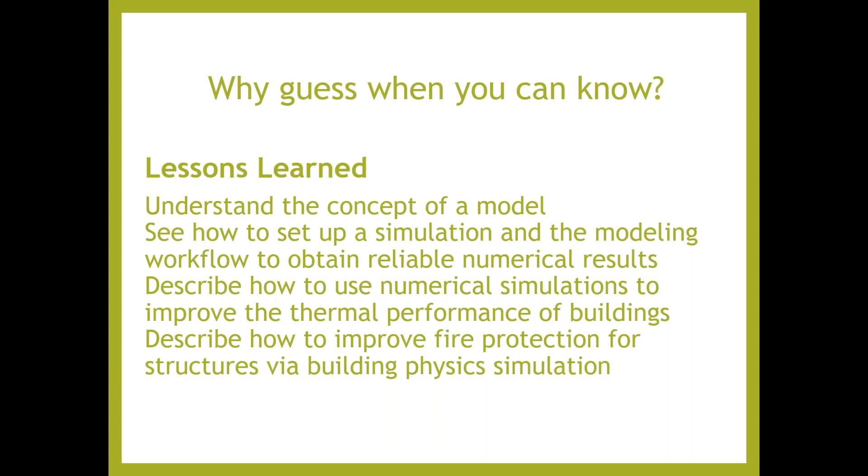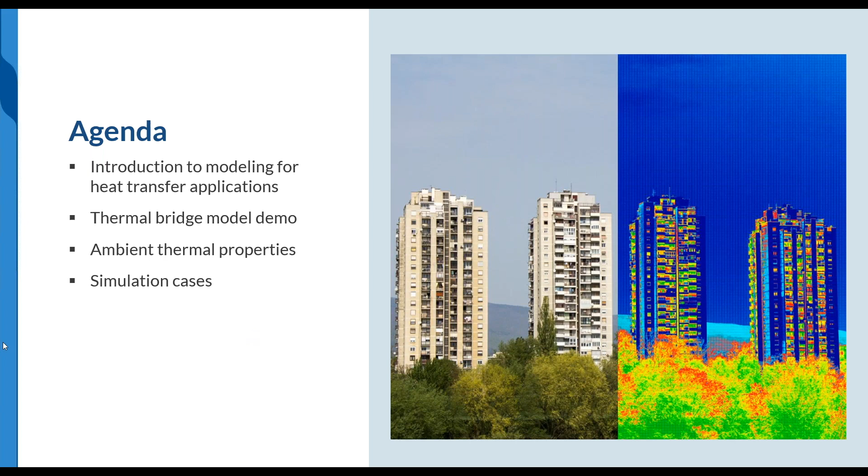Okay, so introduction to modeling for heat transfer application. First of all, what are the benefits of numerical simulation, and what can you expect from it?

There are actually multiple motivations to use numerical simulation. The benefits are not the same for all projects. It depends on what you know already and what you want to know.

I often say that the art of simulation is to tell the software you are using what you know, so that you can get as much as possible from the software, from the simulation, to know more about the system you are interested in.

So, for example, if you observe something like a poor thermal performance that is not expected, then the numerical simulation can help to understand how it occurs.

It helps, for example, if your model contains the temperature, thanks to simulation, it's possible to check the temperature at any point, at any time, which is of course very difficult in reality, but also it helps to check the importance of the different physical mechanisms, like condensation, ventilation, or thermal bridge.

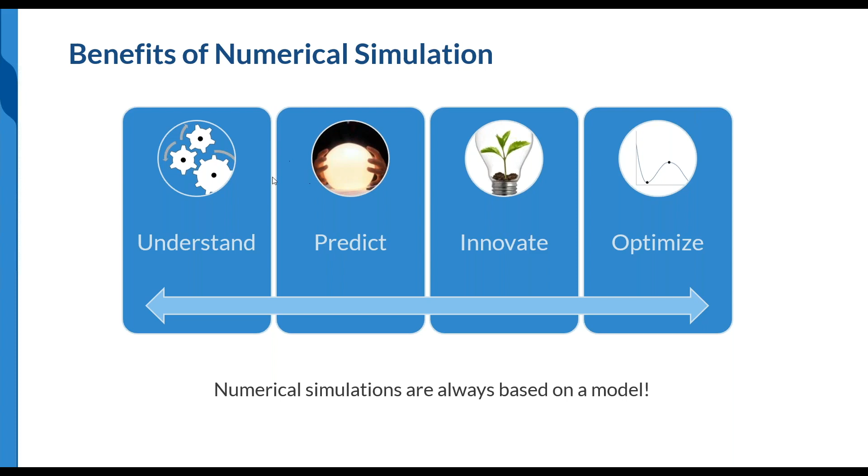And a model is a representation of a reality. This concept of representation is really important, and it's supposed to reproduce or to predict a real behavior, but for a range of configurations, and it's based on the laws of science that describe physical phenomena and translate them in terms of differential equations.

For example, Navier-Stokes equations describe fluid flow behavior, or Maxwell equations describe electromagnetic fields. And traditionally, the physics are segregated into a single physics category, like fluid flow, heat transfer, structural mechanics, etc.

But in nature, they exist all together and they interact. So if you want to be accurate, it's needed to combine the physics in a model and get a correct description of reality. So the reality, in a sense, is always multiphysics.

And I insist on that already, but it's really important to keep in mind that a model is a representation of a reality. It's not the reality. And it's always simplified in a way or another, so that the model is manageable. The best model, I would say, is the simplest model that matches your need.

So it will always rely on some hypothesis that will limit the validity of a model to a range of configuration, which is supposed to be the range of configuration you are interested in. Let's take the example of a geometry.

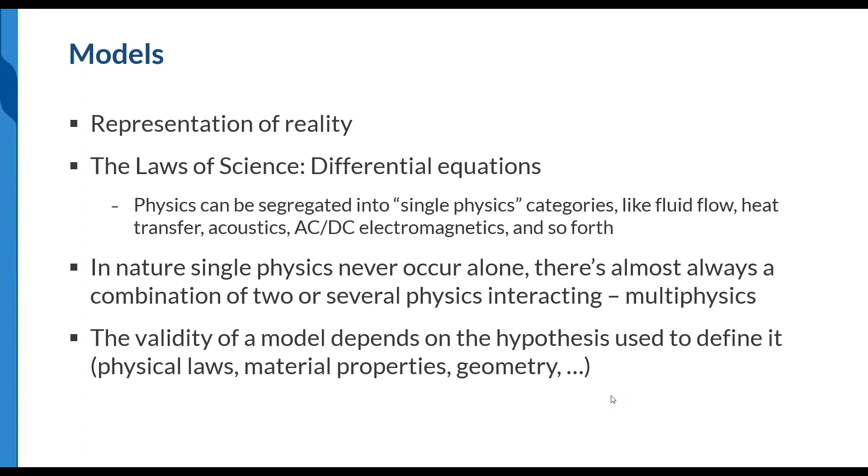And for this kind of system, we have a lot of efficient algorithms that can be solved efficiently on computers. Thanks to the computers, we get a solution that is the best approximation up to a tolerance that can be obtained for the discretization, for the mesh that we have chosen. In general, when you refine the discretization, when you use a finer mesh, the computational cost increases, but also the accuracy gets better and better.

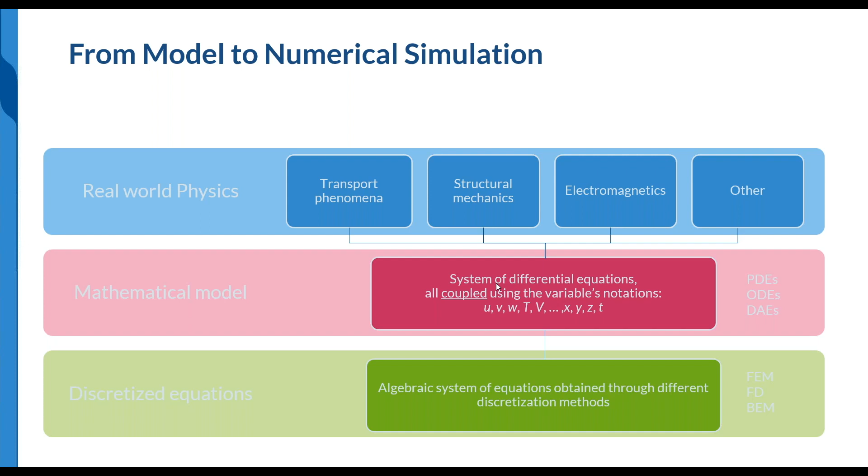So that's the classical step for setting up and solving a model. First of all, very important, the model definition. That's the very first step, and you cannot go forward until this has been completed. You need to define what you want to represent, the physics you want to account for, the material properties, etc. Everything that will be describing the model.

And maybe while you are working on this step, you will realize that you miss some inputs, like you miss material properties. So you need to find them before you go to the simulation software.

And then you start using the simulation software, which is rather straightforward, I would say. You define the geometry, as I mentioned earlier. The geometry should be accurate up to a level of detail that you want to account for, but you will also have to prescribe some boundary conditions. So it's important to have a geometry so that you are able to prescribe a boundary condition.

Let's say that you have a heat source in a device. Close to this heat source, the temperature field is changing a lot, and it's difficult to predict the temperature without simulation. So typically you cannot set a boundary condition very close to the heat source. But if you take something very far from this heat source, then you can assume that you have ambient temperature conditions, and you are able to prescribe a boundary condition.

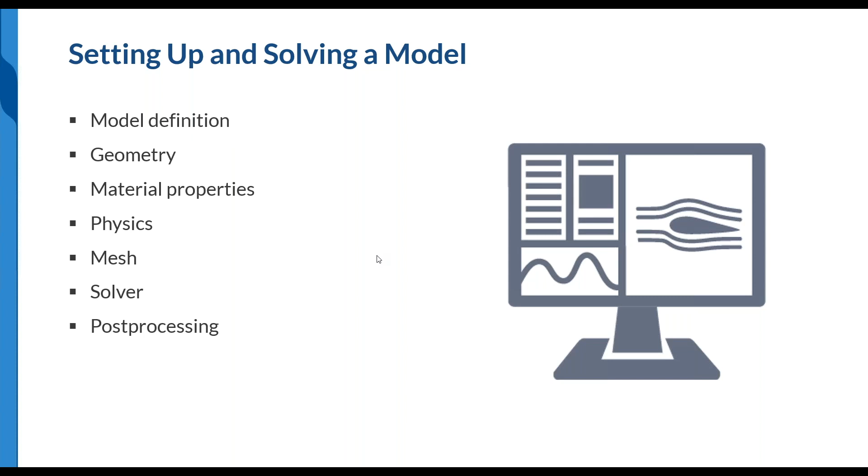So before we build the example, I will give some explanation about what we do, especially for heat transfer. That's my part, and that will be the core of most of the examples. So heat transfer occurs following three means: conduction, convection, or radiation. If you are able to describe the three kinds of heat transfer, then you are covering all heat transfer.

Heat transfer by conduction is something that occurs on material. If you are in vacuum, you have no heat transfer by conduction. But as soon as you have a material, you get conduction. It requires a temperature difference, and the magnitude of conduction is proportional to the material property, which is the thermal conductivity. So again, we have the physical laws that define the heat flux by conduction as minus the thermal conductivity times the gradient of the temperature.

This is something, of course, that you don't need to know, but that will be used under the hood to define the equation I mentioned in the introduction.

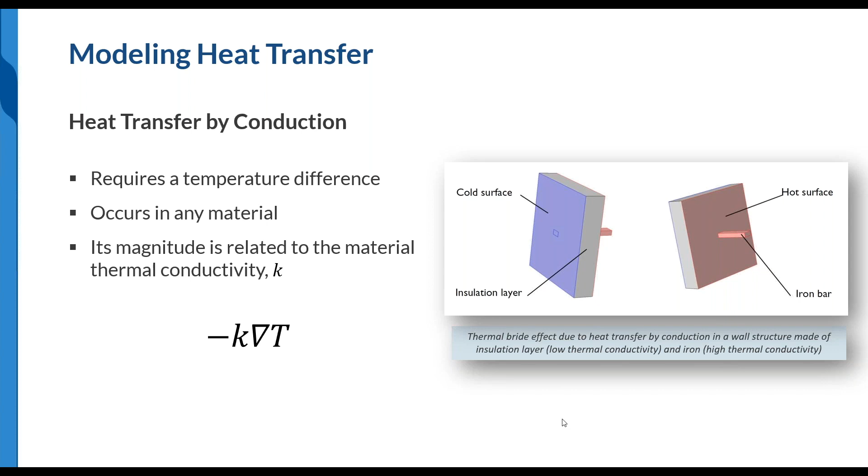So if you assume a case that we will demonstrate later on, where you have a wall made of insulation material with a cold surface, the blue surface here, and this is another view of the same geometry, but on the other side where you have a hot surface, then because you have a material between this cold and hot surface, you have a temperature difference and a given thermal conductivity, so you will have some heat transfer by conduction. And here you have two different materials, so you will have different conduction effects depending on the material properties. We'll go back on this example rather soon.

So the other means of heat transfer is heat transfer by convection. This one also occurs only when you have a material and motion. You can have forced convection when you have an active system responsible for the flow, or you can also have natural convection. In this case, it's just the buoyancy and the difference of density that is responsible for the motion.

Again, the physics laws give a definition of the magnitude of heat transfer by convection, which is proportional to a material property called the heat capacity, Cp, and also the density. So we have the density times the heat capacity times the velocity times the temperature that gives the magnitude of convection, heat transfer by convection, and that explains why conduction alone is not defining the temperature profile in this example.

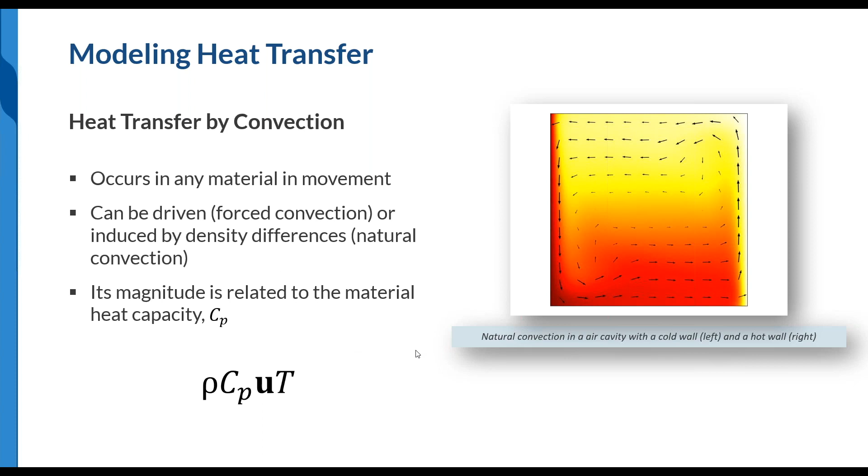And when you want to account for heat transfer, by default, you have to combine the three modes of heat transfer. If you know that for one reason or another, for example, there is no transparent media in your geometry, or there is no motion, then you can skip one of them. But if you don't know, then you may include all of them.

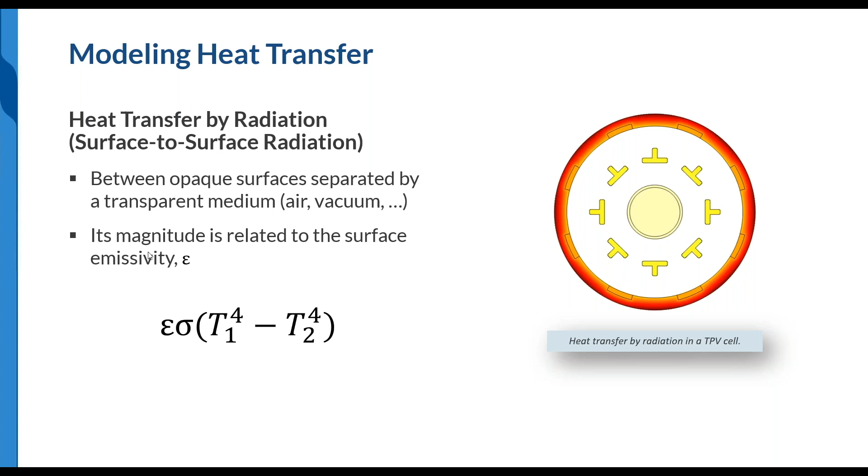Okay, so now I will show this example, this benchmark example, and we will build the model together. So first of all, I have to describe it.

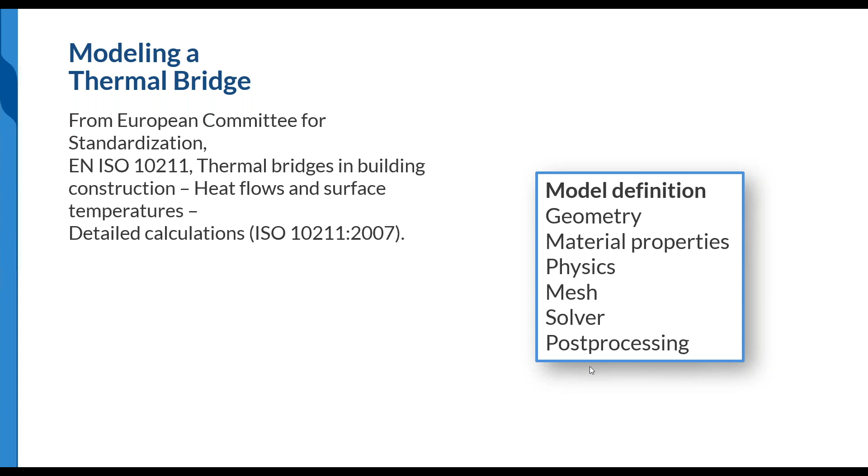So for this example, if we recall all the steps - model definition, geometry, etc. - we have to start with the model definition. In this case, we are lucky because the model is well documented and defined in the European standard for thermal bridges in building construction, so heat flow and surface temperature. This benchmark, this norm from 2007, is ISO 10211, and it gives all the details - the geometry, material property, the physics - all the physical details needed to build this example. Then it's up to us to find a mesh and solver settings that match the accuracy they expect.

Okay, so the geometry for this thermal bridge is the geometry we have seen before. It's a piece of wall which is 1 meter by 1 meter with a thickness of 20 centimeters. This is an insulating material, and it contains an iron beam. As you can expect, it will be responsible for a bad thermal bridge, and this beam is 10 centimeters thick, 60 centimeters long, and 50 millimeters high. So that's a pretty simple geometry.

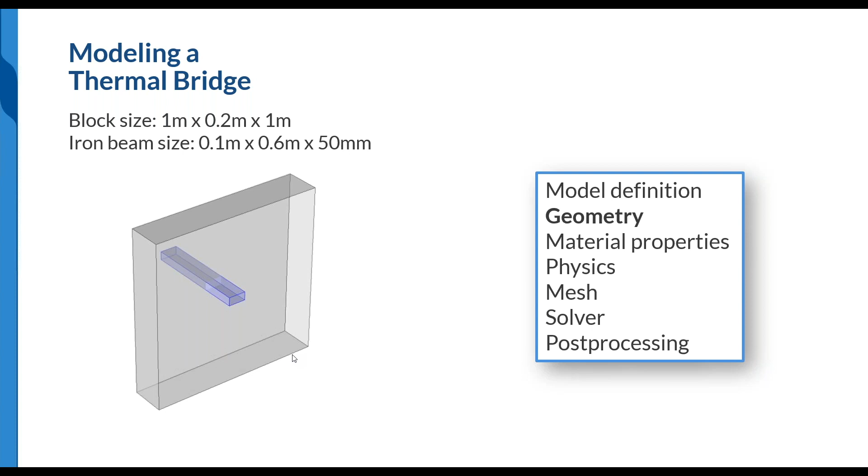In general, the geometry is of course much more complex, and you can either draw it in the simulation software or build it in a modeling geometry, a CAD software, and then import it into the simulation software. There are a number of standard tools for that, bridges between simulation software and CAD software.

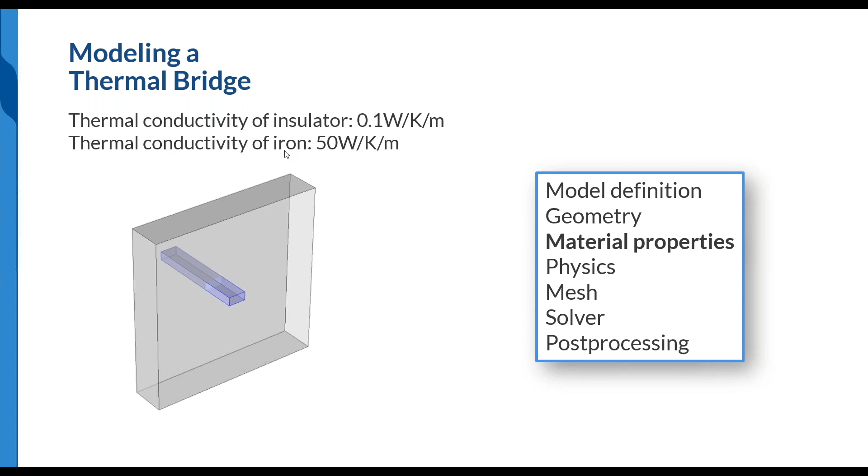Then for the material properties, we have a material property for the insulator and for the iron, so it's only two materials, and that's it. For the physics, of course, we have thermal conduction in solids. As soon as you have a material, you have conduction. There is no motion, so there is no convection, and the radiation is assumed to be small enough to be neglected.

So this model will contain only conduction. On both sides of this geometry, the blue face here represents the exterior and it's cold, and the inner surface here represents the interior, which is hot. We don't have a prescribed temperature, but we have a convective heat flux condition on both sides, which means we have an exchange heat flux proportional to the temperature difference between the surface temperature and the exterior or interior temperature, times a coefficient, which is the heat transfer coefficient, the convection coefficient.

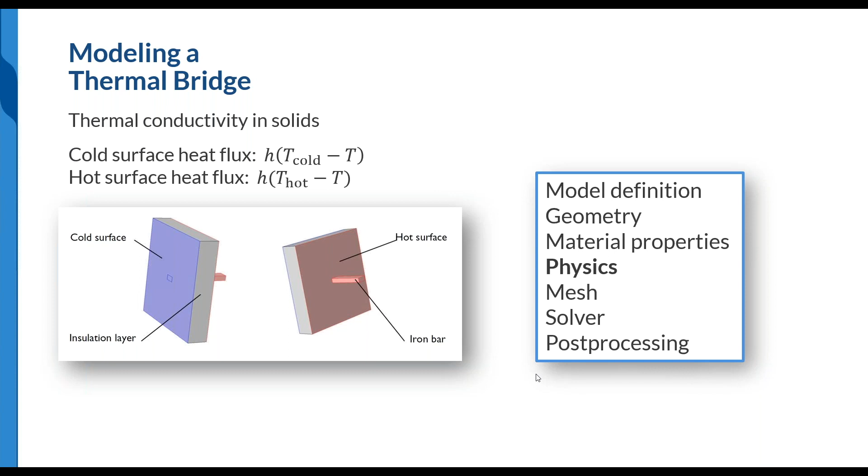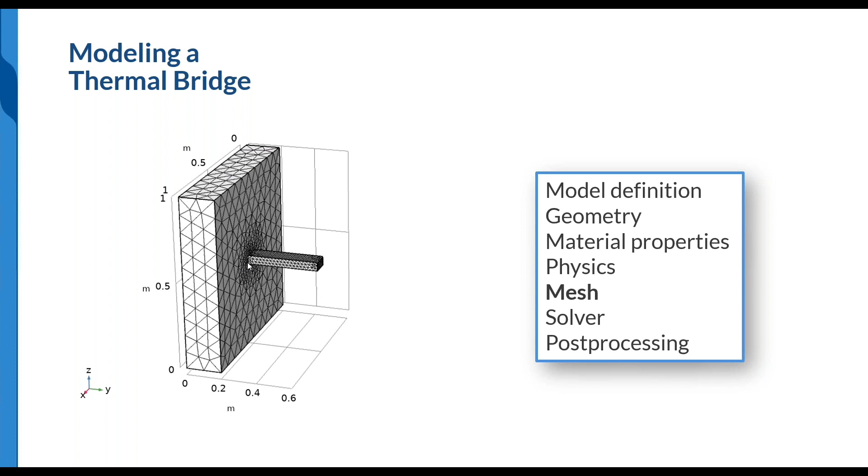And that's it. For the mesh, this is up to you. This is not something defined in the standard, so we have to find the good one, but we expect that we'll have temperature gradients at the junction between the iron bar and the insulation material. So we will use a finer mesh for the bar here.

For the solver, there is nothing special to it. It's such a small model that we can just use the default, and it's very quick to get a solution.

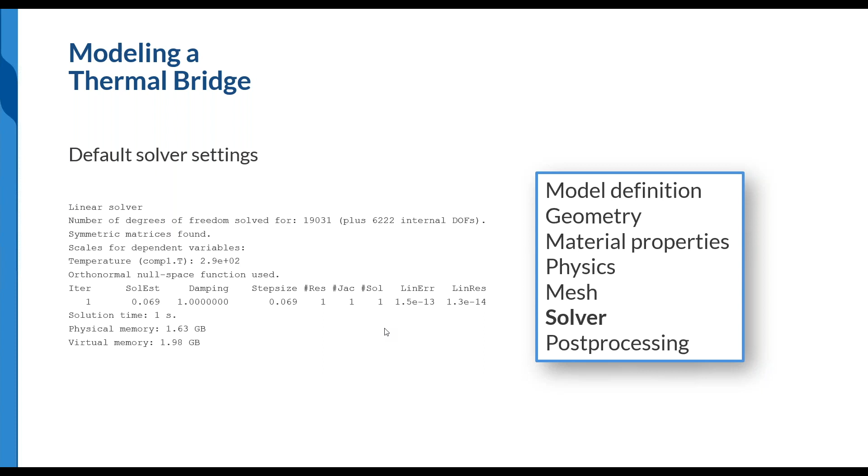And then, of course, the post-processing is what we are really interested in. We expect to be able to plot the temperature everywhere in the geometry. And again, the standard gives some target value for the highest temperature on the external side. So on this side, because of the iron bar, you expect that you will get some heat from the inside that is reaching the external side. So the maximum temperature will be computed, and also the heat flux.

So due to a thermal bridge, the heat flux on this face will be larger, than without the iron bar for sure. So let's switch to COMSOL Multiphysics to build this model live and see how to proceed.

So we have this model wizard that will guide us to build the model. So the first question is to select the space dimension. So obviously it's a 3D model.

Then we have access to a number of physics interfaces. You can see all the physics here. We are starting with a single physics model with heat transfer in solids. We could add more, but I start with just one physics.

And then we can also study different kinds of studies - stationary, time-dependent, or more advanced studies. In this case, the benchmark is looking at the steady state, not the startup effect or things like that, but just the steady state with a stationary study.

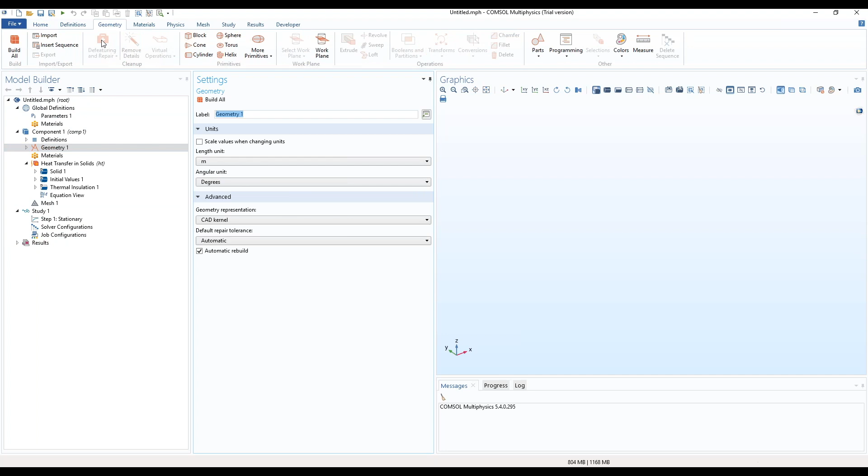So for the geometry, we don't need to import this geometry from another software. We can easily build it using the tools that are available, like we need a block for the wall.

So the block is 1 meter, then it's 0.2 meter thick and 1 meter high. So we can check how it looks like. This is this block. We will add another block for the iron bar.

So this is 10 centimeters, and then it's 60 centimeters long and 50 millimeters. You can see here that we have a unit, and if you don't want to work in meters, you can specify the unit using brackets like that. So here I say I want 50 millimeters.

And I have to think a little bit about the position. I will define the position of the center of this bar in the middle of this block, so 0.5 and 0.5, and the middle of the bar will be located at 0.3 for the y coordinate.

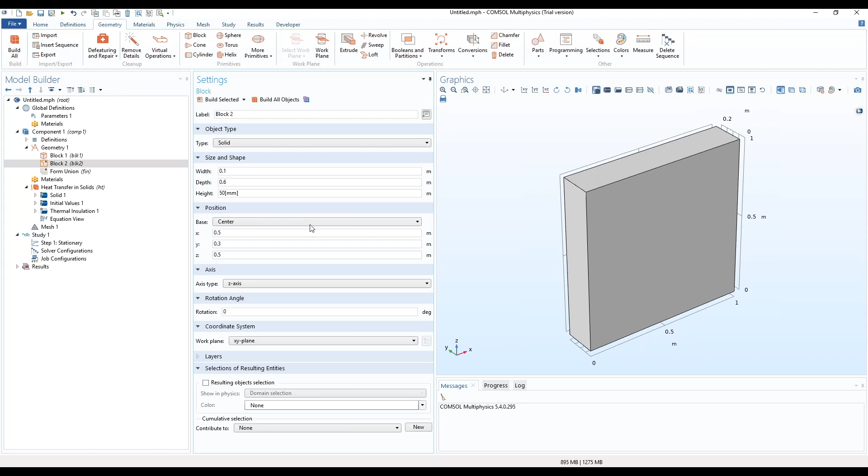So if I build everything, I can see that I have my bar made of iron, and the insulating material here.

As you can see, they intersect, so there is a region where, in a sense, we have both materials, and this is something that is detected at this step.

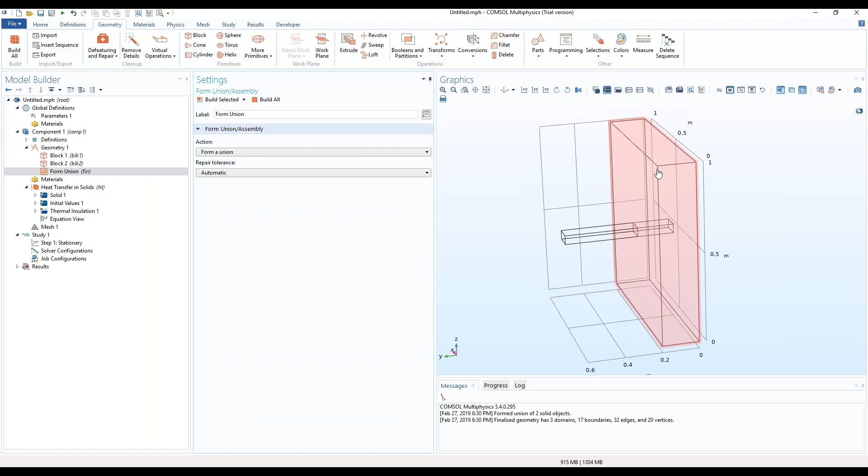And if I switch to wireframe rendering, you can see that there are 3 domains, one here, another one here, and another one here. So I don't want 2 domains for the iron bar, it's only one in reality.

So I will perform an additional step here for my geometry. There is something called virtual operation to form composite domains. And I will say that these 2 domains are actually a single domain.

And if I build all, now I can check that I have 1 domain for the insulating material and 1 domain for the iron bar.

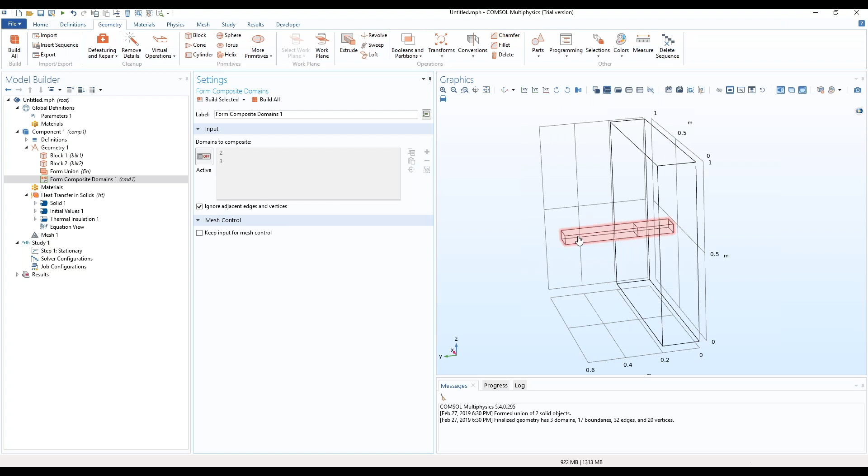So typically I'm done with the geometry definition, and I can switch to the material definition. So for the material here, I could...

Browse material libraries and get predefined materials, but in this case, I really want to stick to the standard. So I will create a blank material and define the material properties myself.

So for example, for this insulating material, or for the wall, the thermal conductivity has to be equal to 0.1, and I can also specify density, even if I'm not going to use it for a stationary study, but just for completeness, I define everything.

And if I add another material here for the iron bar, the thermal conductivity is much higher, it's about 50. And the density as well is higher, and the heat capacity is a little bit less, like that.

So now I have 2 materials. I have this one defined on domain 1. Domain 2 is overridden by the next material, which is iron.

Okay, so this step about material properties is now completed as well. I can switch to the physics.

So I have heat transfer in solids. This physics interface is responsible for translating the law of physics into equations that the mesh and the solver will take care of afterwards.

So for example, in the solids, there is an equation that we rely on with Fourier's law, for example, which is recalled here. And you can see that they involve some material properties, and these material properties are said to be taken from material.

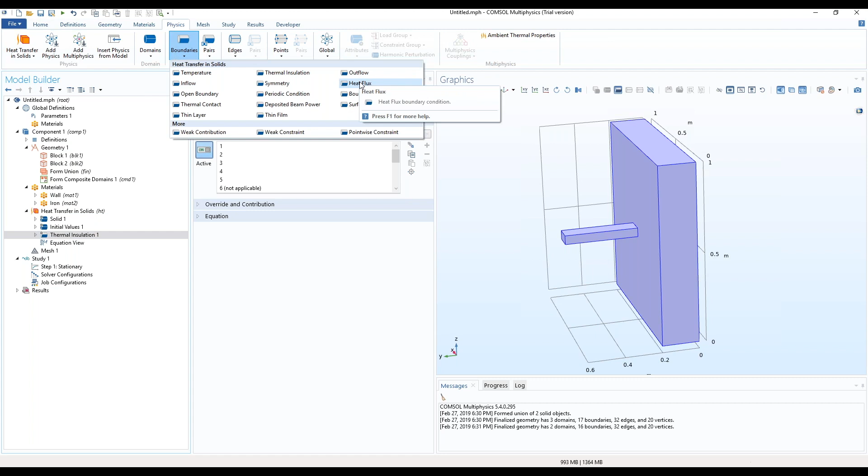So there is a heat flux boundary condition here. I have to select the boundary where I want to apply it, so I can change the view, for example, this one.

And thanks to this tool, I can select all the boundaries and go back to the view.

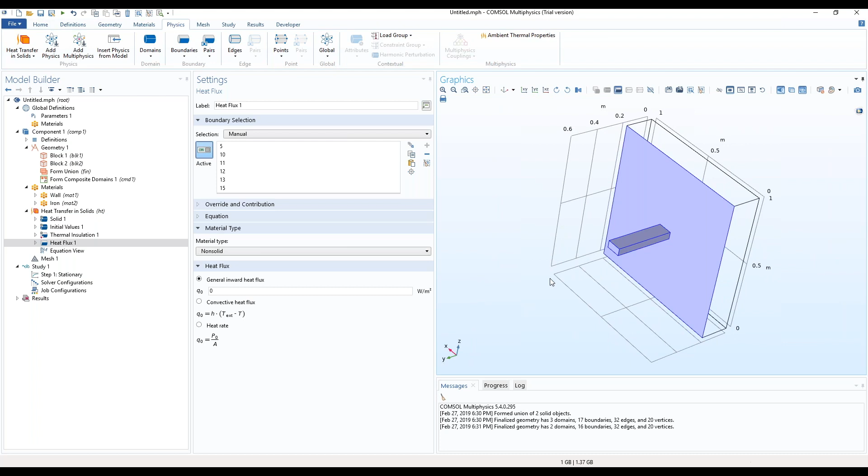Okay, I took all the boundaries except this one, so now I have all the interior boundaries. So I'm saying that I want to apply this boundary condition to all this boundary, and this boundary condition is a convective heat flux condition.

So here you can recognize the condition that I showed before, where the heat transfer coefficient is given and is 10.

And the exterior temperature, the benchmark uses a normalized temperature difference, so 1 degree between the inside and the outside. So here I'm just setting 1 Celsius, even if it's rather cold for inside.

That's the standard, and that's the definition of the model we want to reproduce. And I need to use another heat flux condition for the exterior. So the same convective heat flux condition, the same heat transfer coefficient, 10, but a different temperature.

So 0 Celsius here, and of course I need to specify which boundaries are exposed to this condition. So these 2 boundaries, and that's it. And I'm done with physics.

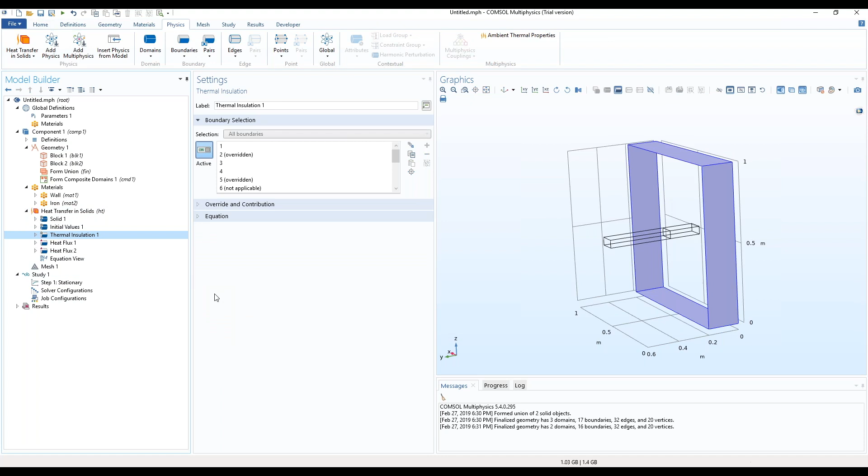So if we go back to thermal insulation, you can see that it has been overridden in most of the boundaries, but it's only now active on 4 boundaries, which is exactly what I was willing to do.

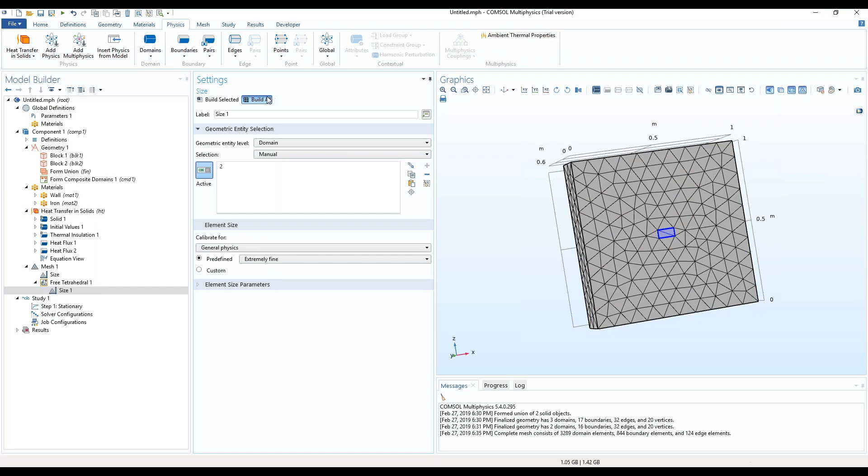So now we can check the default mesh. The default mesh is like that. It's pretty coarse for the iron bar, for example, so we can easily tune it manually. We can edit the automatic sequence, and we see that there are some instructions to build the mesh, and here we can prescribe a different size for the bar. So for one particular domain, we'll say that we want a much finer mesh, and rebuild the mesh, and you can see that now we get a finer mesh here, which will help to get accurate results.

For the solver, there is not much to do. We can just solve. It's very quick.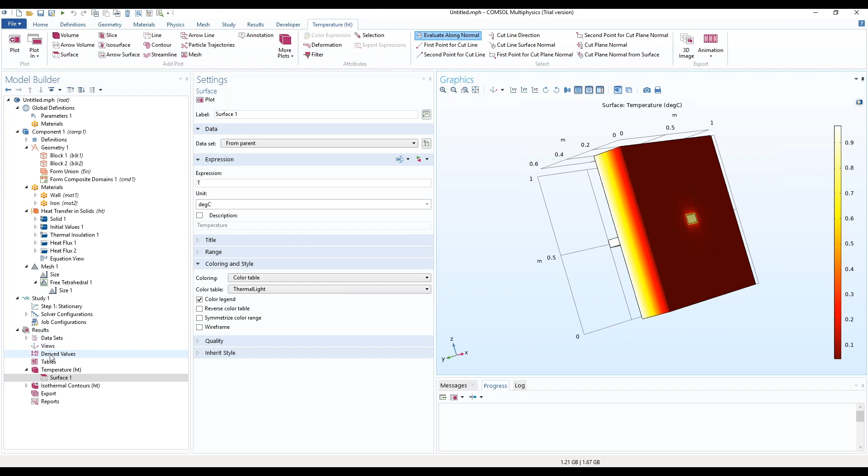And then the benchmark gives some indication about what we should find for the maximum temperature on this side, so we can evaluate the maximum temperature on the surface formed by these 2 boundaries, and check the maximum temperature on these 2 boundaries in Celsius. And so if we ask to evaluate, we see that the maximum temperature is 0.8 Celsius.

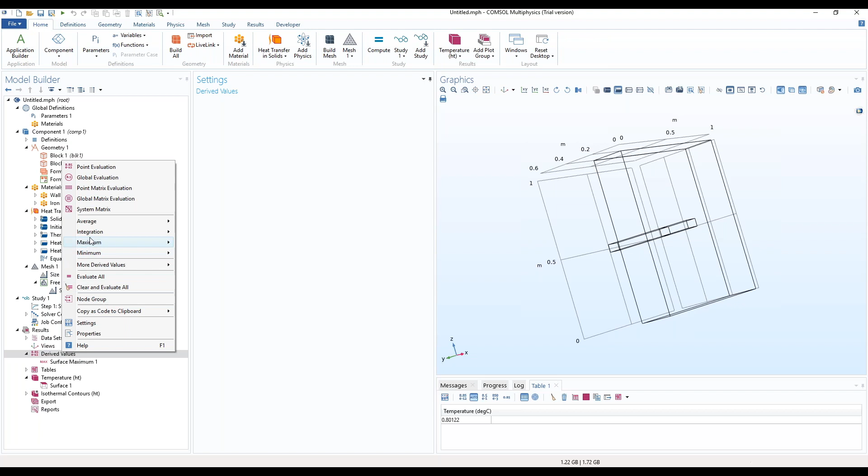And if we want to see how much heat flux we have for 1 Celsius, or 1 Kelvin, of difference between the 2 sides, we can also integrate on the surface the inward heat flux. Here there are a number of predefined variables, but you don't need to know them, you just type what you are looking for. You see there is a boundary flux called inward heat flux, you select it—that's the name of the variable—and you can integrate it on the boundary. You see that you lose about half a watt on this surface.

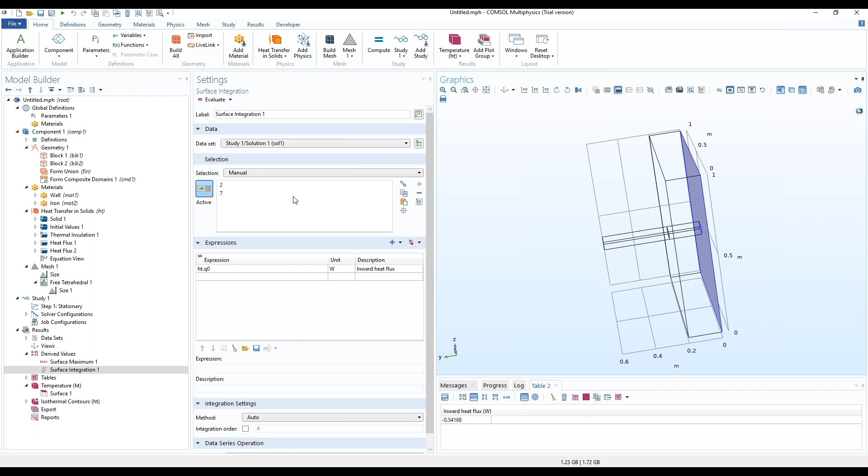So we get the simulation outputs, and I mentioned that when you have a model and it's working well, then you can modify your design to see the different heat losses or different maximum temperature for different configurations.

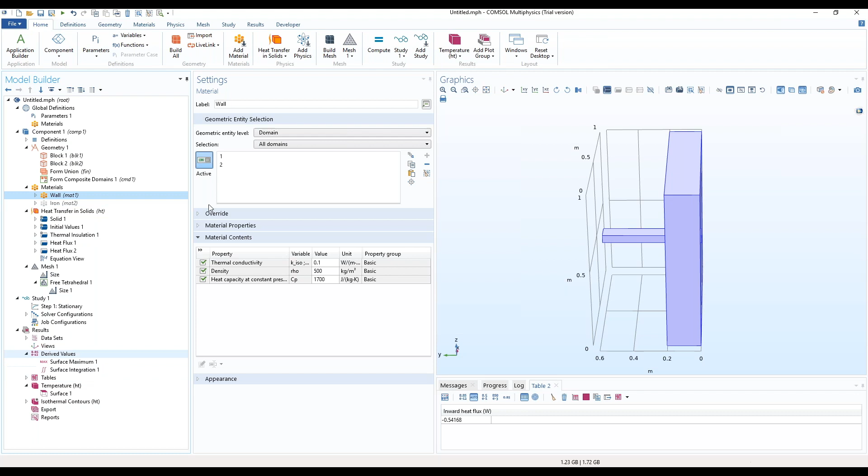So let's assume, for example, that everything is made of insulating material. It's very simple: you just deactivate these material properties, and for all domains you get the insulating material properties, and then you just have to rerun the simulation.

And you can check what is the difference—you can obviously see that the temperature profile is very different. You can then reevaluate the maximum temperature and see that now it's much smaller on the outside, which is expected because you no longer have a thermal bridge. You can also check the effect on the heat flux, and you see that something like 20% of the heat flux is saved without the thermal bridge.

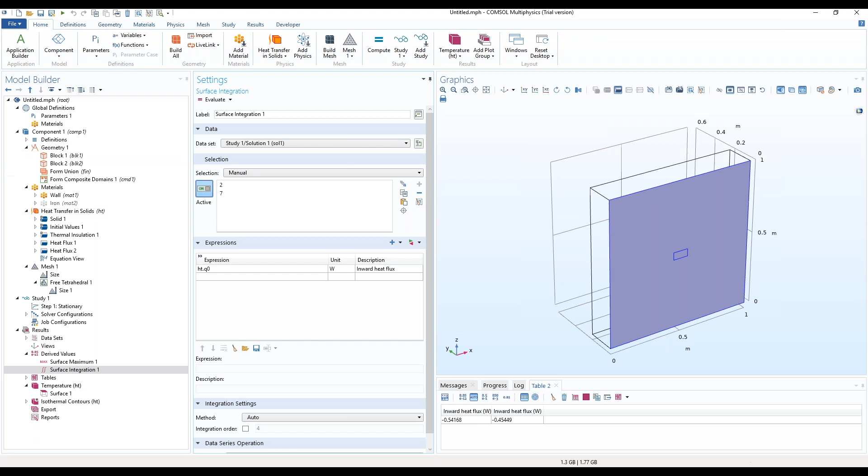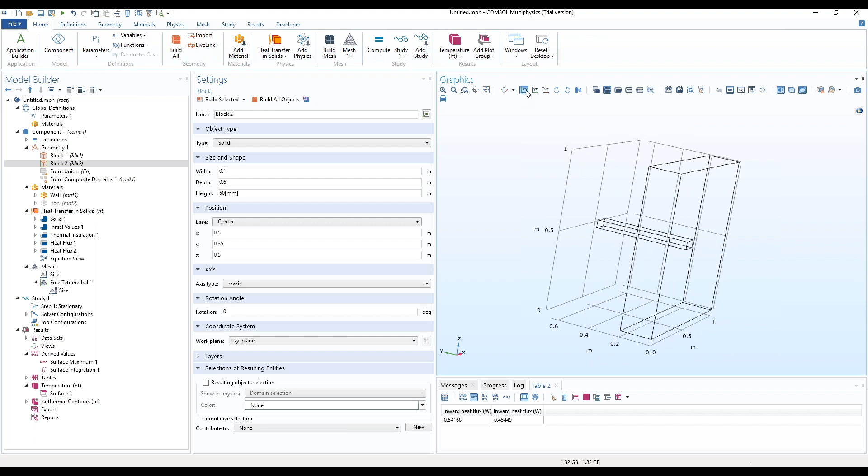And you can explore many configurations. I will not check everything, but let's imagine that you want to change the position of an iron bar so that it's not going through all the thickness of the wall, but just half of it. You change the position of the center here, you rebuild the geometry, and now if we change the view, we see that it's not going through all of it.

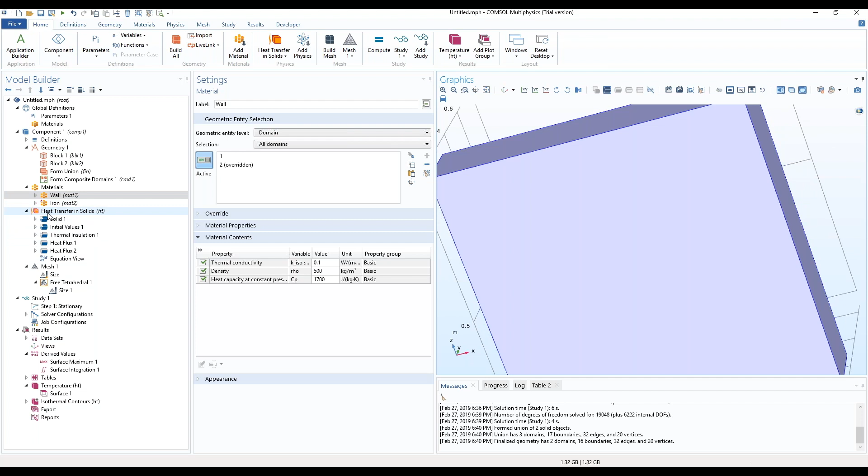And if we go back here, we reactivate this condition: so we have the iron bar and the wall here, and now you see there is no imprint of the iron bar on the external side. If we quickly check the physics settings, we have a heat flux as before on these sides, and another heat flux on the exterior side, which is fine. We get a new mesh, of course, because we have a different geometry, and we can solve it.

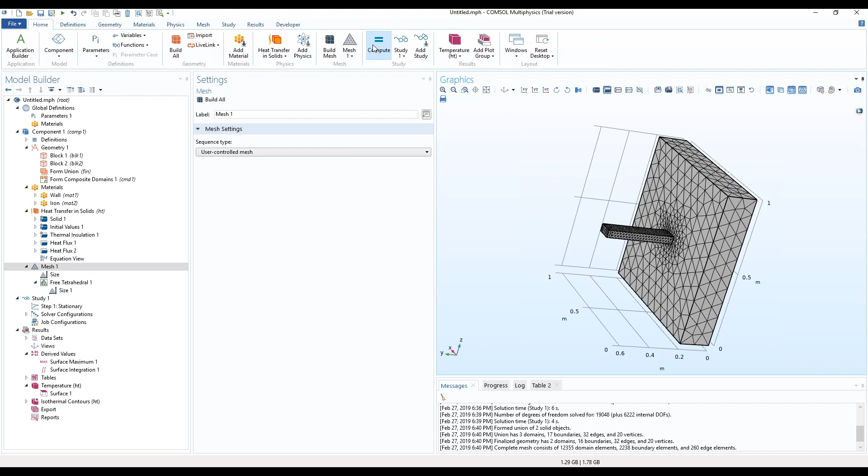And hopefully we get a solution there. And on the solution, we get a small sign that there is a thermal bridge, but clearly not as large as before. So we can check clearly the value of the temperature.

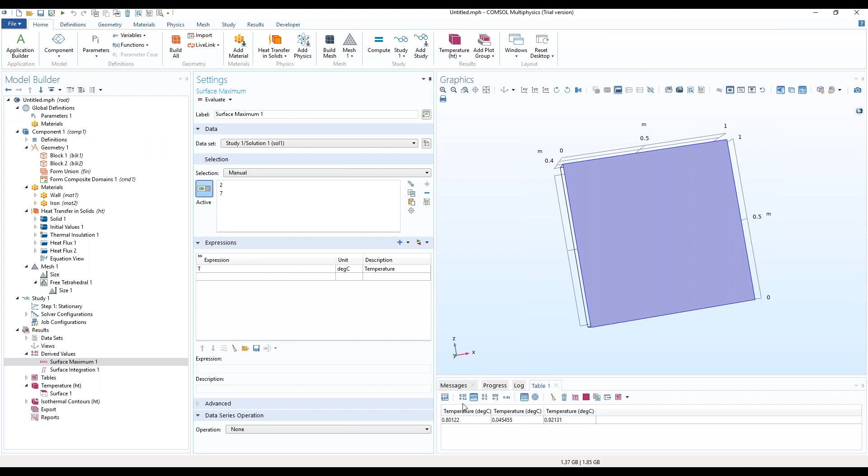So I'm selecting two boundaries here, this one and this one that is now in the middle of the geometry. I clearly don't want to compute the maximum on the internal boundary, but just on the external boundary, to compare things that are the same.

So let's evaluate again. You see that the maximum temperature is not as small as in the case without thermal bridge, but much smaller than in the first example. And if we check the heat flux through this wall, we see it's also much smaller than in the first case, but not as good as in the last case.

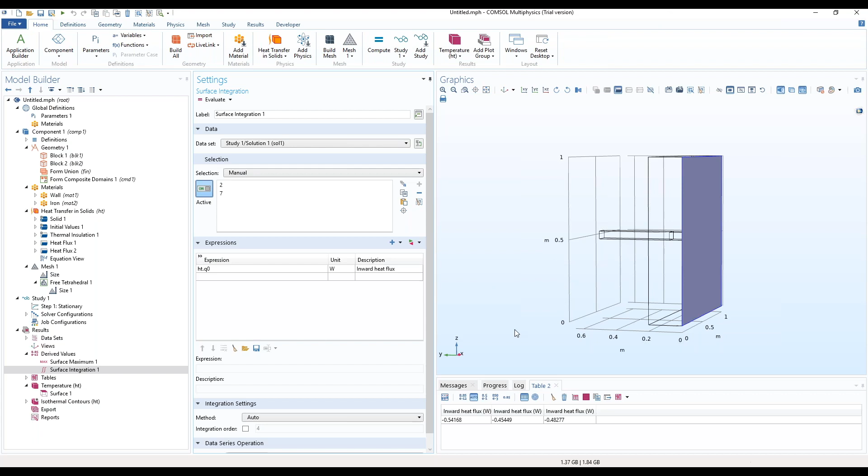So that's a quick illustration of what you can expect from simulation.

Okay, now back to the presentation and the slides, and a word about ambient thermal properties.

The motivation for that is to get realistic conditions for outdoor applications. Depending on the place where you are, the time, the date, etc., you have different conditions, and it's useful to know them. You are also often interested in extreme conditions - is the design good for the hottest or the coldest temperature condition?

And also to customize a model. You may develop a model for one particular client, and then you want to use the same kind of model but for another customer in another location. So then you need to update your ambient thermal property to match the reality.

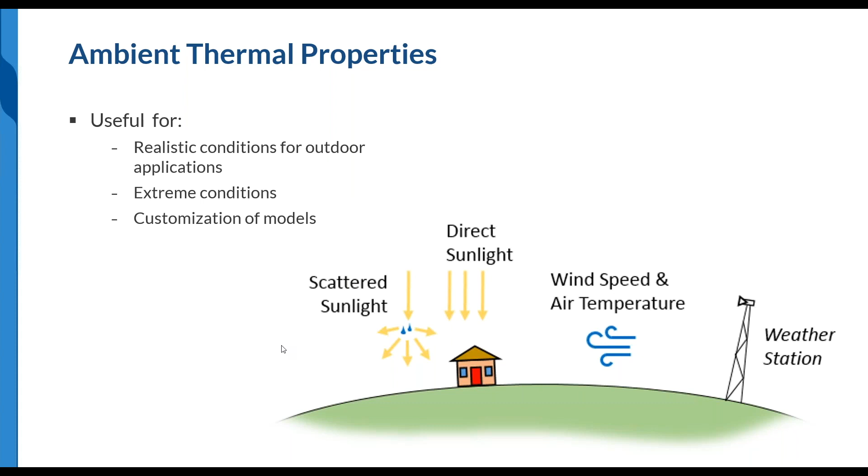Most of the time the ambient properties are obtained from weather stations that monitor, let's say, the temperature for every hour during years and years. For a particular date, month, or week in the year, you gather that data. Every curve here represents, for a particular month, the number of times for each hour where the temperature was 3 Celsius, 4 Celsius, 5 Celsius, and so on.

So you have this large amount of data, and if you process it, you can deduce what is the average typical temperature for every hour in a day, and you get these kinds of curves here.

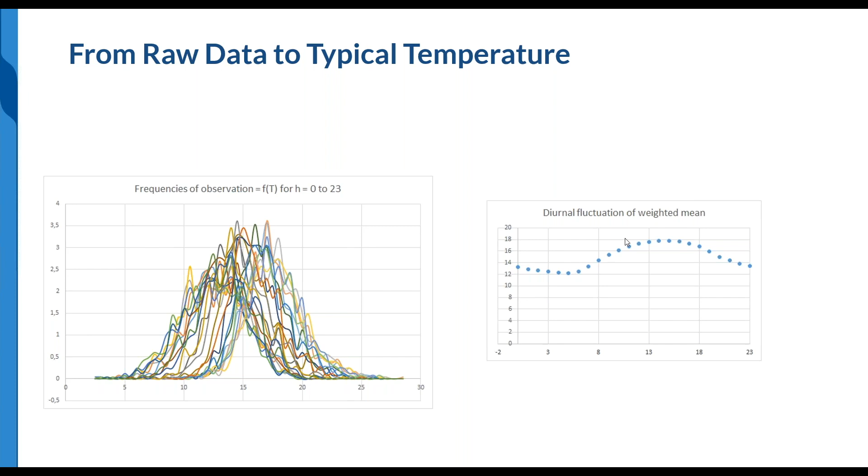And you can also get more than the average temperature. You can get the maximum temperature ever recorded, the minimum temperature ever recorded, as well as the standard deviation to get a typical hot temperature. If you take 2 times the standard deviation, you get a very hot or very cold typical temperature.

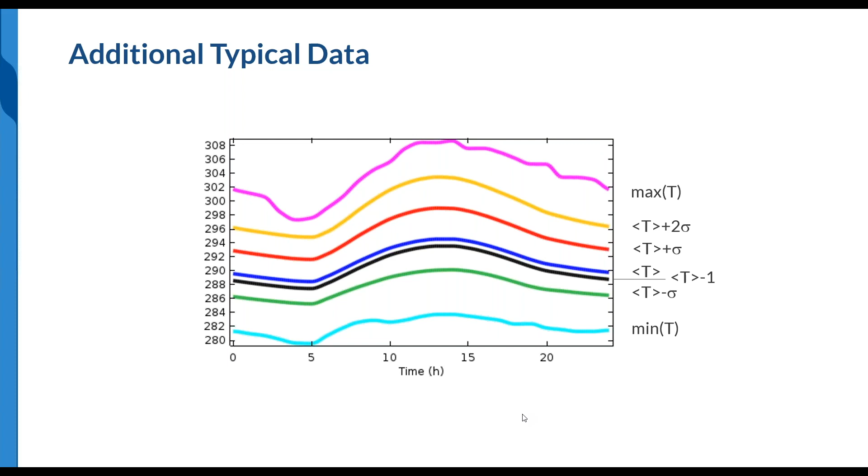So from that, you can generate any kind of typical weather condition to use in your model. And the good thing is that this kind of data is quite easily available. For example, ASHRAE is compiling this data for something like more than 8,000 stations around the world, and you can reuse them.

To define ambient conditions, these data, as I mentioned, depend on the season, the month, the time. So you can really use that as a transient condition in your models, and that makes it possible to account for day and night temperature, for example.

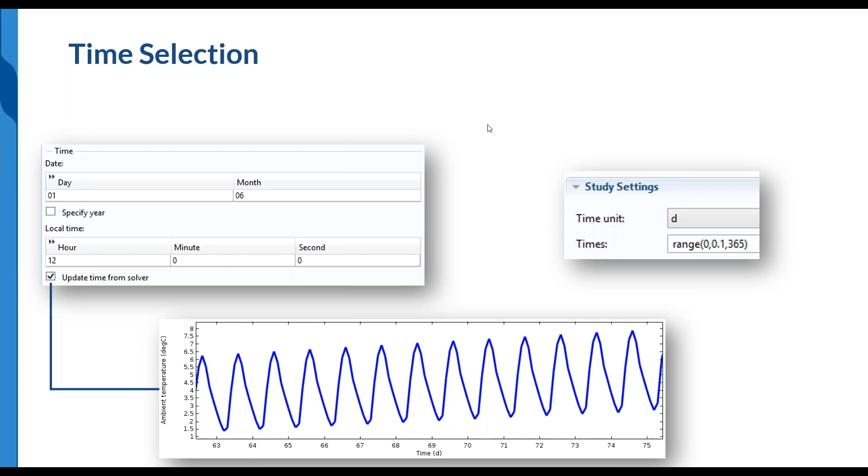And here we see the temperature variation during more than 10 days for a particular location and particular date. And of course, you should decide if you want the typical temperature, maximum, extreme conditions, and so on.

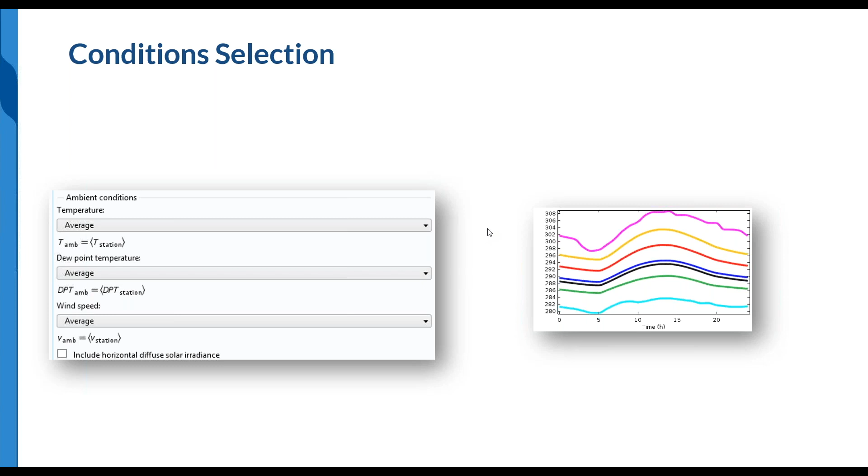And once you have defined a profile for your ambient condition, you can include that in your model. For example, if you prescribe a temperature condition or heat flux condition, you can refer to this database through any tool and get the effect of this ambient condition on your model. And if you change the weather station in your model, you get the behavior for another place.

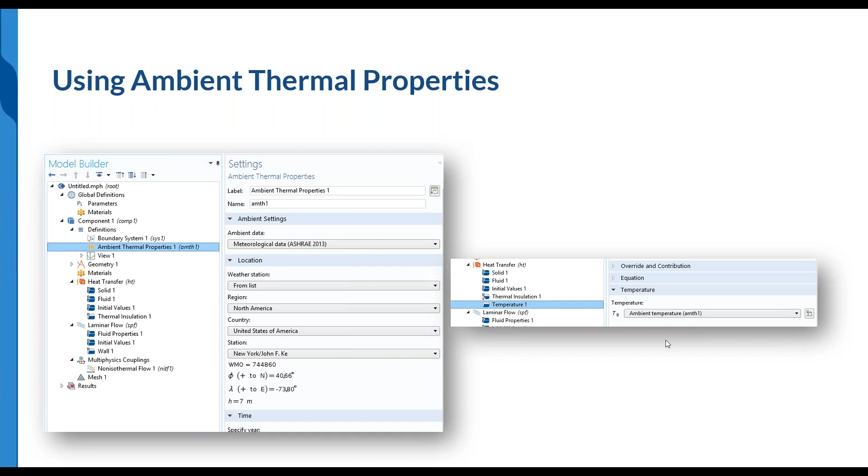Okay, so now I will go through a number of simulation examples related to other applications. Again, I'm taking a very classical example from a standard. This one is from a European standard about action on structures.

Exposed to fire. So when we are looking at fire protection, there are some passive protection capabilities that consist in making a building good enough to resist fire for a time that is long enough so that you can evacuate and it's not destroyed too quickly. One way to make sure that the materials of a building will not be destroyed is to make sure they are not getting hot too quickly when exposed to fire. So this benchmark is about monitoring the temperature in the center of a block that is exposed to fire.

What is very interesting in this benchmark to me is that everyone can easily understand that modeling fire in all details is something very difficult. But here they give key information to model fire in an efficient way, and then it's possible to build a model quite easily, but it's still of interest for the model.

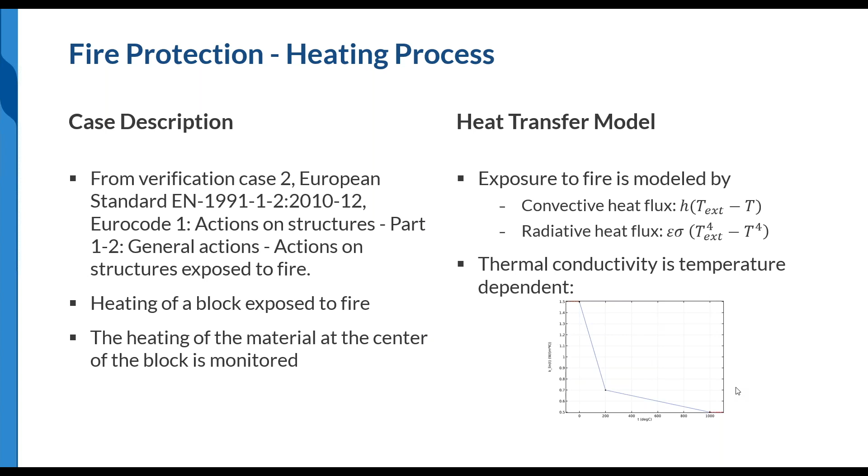So this model monitors the temperature in the center of the geometry. At the beginning we have a cold temperature, and we can see that it increases. You can distinguish a blue and a green curve, the simulation curve and the reference curve, and they are extremely close, which is a good thing. We get the temperature profile for 3 hours here.

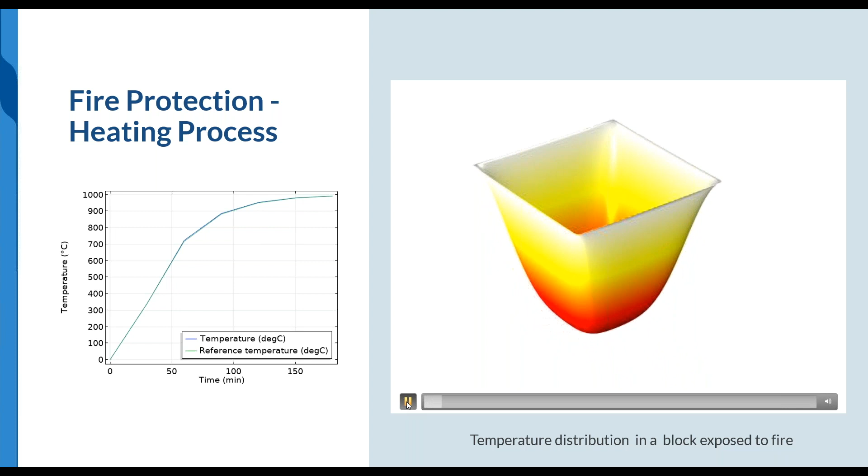We can also represent the temperature in the block as a function of time in this animation. You can see that the bulk of the block has this dark red color representing low temperature, and the edge of the block has light yellow, representing high temperature. We'll see how the hot temperature propagates in the block over time, so of course it's heating more and more. Again, this kind of simulation is to make sure it takes long enough for the material to get above a certain temperature so that it resists fire.

In my introduction I mentioned that in general models are multiphysics, and now we're getting back to that, because when you want to work on fire protection and design the material size and properties to resist fire for long enough, you have to think about the structural mechanics aspect of the problem. The material properties from a structural point of view are not the same at cold and hot temperature, and you also have thermal expansion due to temperature change.

This is something that is covered in these new examples, going from the same standard actions on structures exposed to fire, and they cover a number of points. They cover the fact that the material properties from a structural mechanics point of view are non-linear. It means that for large deformation, you have a non-linear behavior of the material, and these material properties are temperature dependent.

So this is about computing the thermally induced stress in a beam that is blocked on the two ends and exposed to two different temperatures on the upside and the downside. Again, the material properties are given by the standard, so the thermal elongation is not a straight curve, but something that is temperature dependent. Here you get the elongation as a function of temperature, and you can see that at some temperature you get a change in the slope.

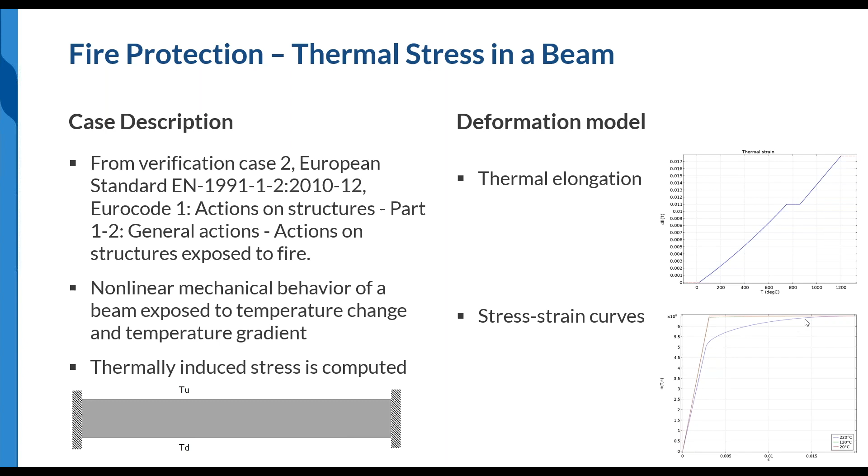And the relation between strain and stress is also given in this benchmark. We can see that for low temperature there is a rather linear behavior and then a sharp change when you get too high stress, while for larger temperature the material is softer and the deformation is smoother in this region.

This benchmark defines two cases of interest. One, you are just heating from 20 Celsius to 120 Celsius, and you expect thermal expansion just due to heating, and you have to compute some stress in the geometry. The second case is where you have heating and also a temperature gradient between the upside and the downside — the upside is very hot and the downside is at ambient temperature. In this case, you expect very large thermal stress in the geometry, and that's something you want to study. This kind of multiphysics problem is something that can be covered by simulation.

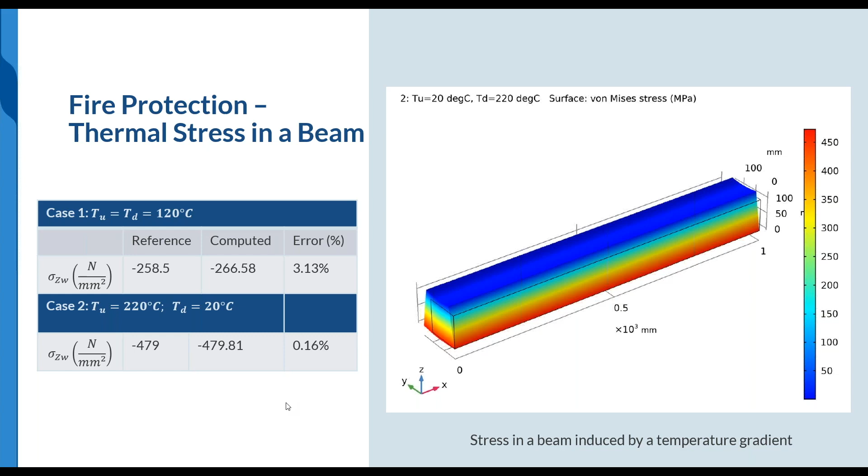Still about buildings and multiphysics, but a completely different topic, more related to thermal performance, is when you want to study the thermal loss through a wall and also the humidity.

You get a heat flux between the exterior, which is at cold temperature, and the interior, which is at a high temperature. And due to the heat flux... okay, I have some noise behind me. I hope it's okay to hear me. If not, just let me know.

So the exterior conditions are defined here. Cold temperature of 0 Celsius and relative humidity of 80%. And inside there is interior temperature of 19 Celsius and relative humidity of 50%.

So the structure of a wall is described here. We have an OSB panel on the top, which is facing the exterior. We have some wood for the structure, and we have a cellulose material inside, and of course some plaster for inside. This model studies the difference of behavior with or without a vapor barrier.

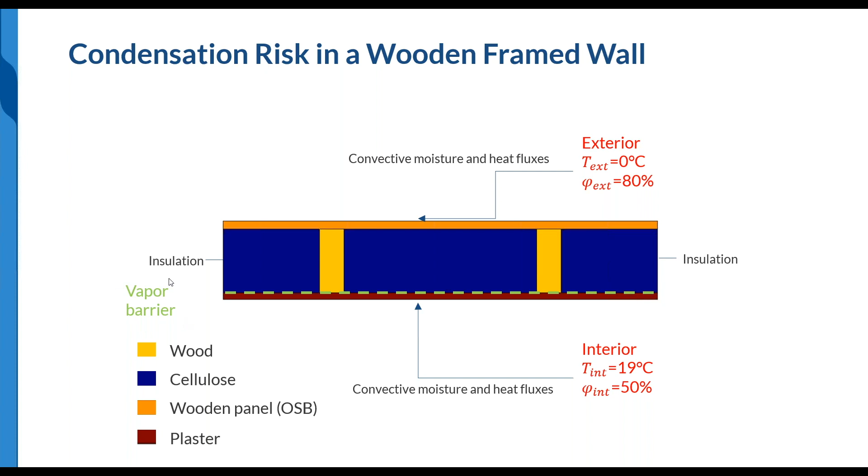So first of all, we have to define what is the physics we want to solve for, and luckily this is something that is defined by a standard. In this case, we are taking the equations described in the standard EN 15026 from 2007, and they give the temperature equation and the equation for relative humidity.

As you can see, for example, in the temperature equation, the heat flux contains the Fourier contribution, but also a contribution coming from the relative humidity. And that coupling is also on the other side. So in the equation for relative humidity, the saturation pressure, for example, is a function of the temperature. So these equations are again documented and predefined.

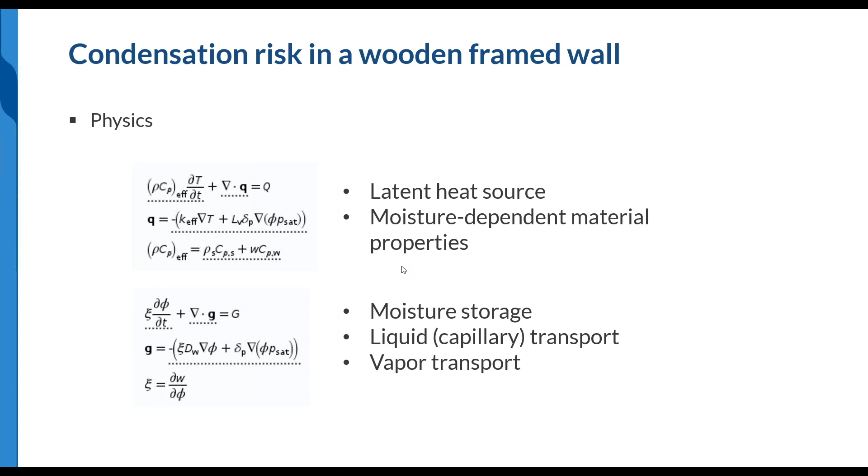So the only thing you have to do, which is not a small thing, is to define the material properties that are entering in this equation. All the material properties for this humidity problem are usually a function of relative humidity.

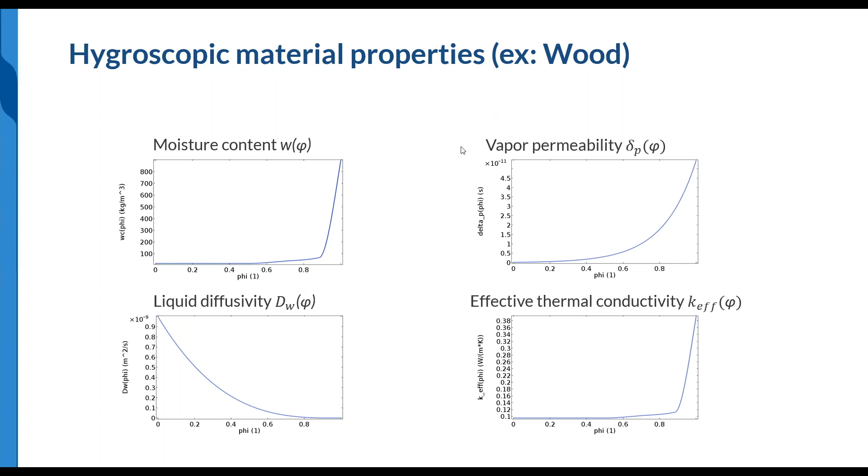Here I'm showing the kind of material property that is used in this model for the wood, for example, but you need the same for all materials. And from that, you can compute the temperature profile and the relative humidity profile for different times and external and interior conditions.

In this model, what is particularly interesting is to check the maximum relative humidity to see if there is a condensation risk. And typically in this case, if you compare the result with or without vapor barrier, you get a large difference in the results.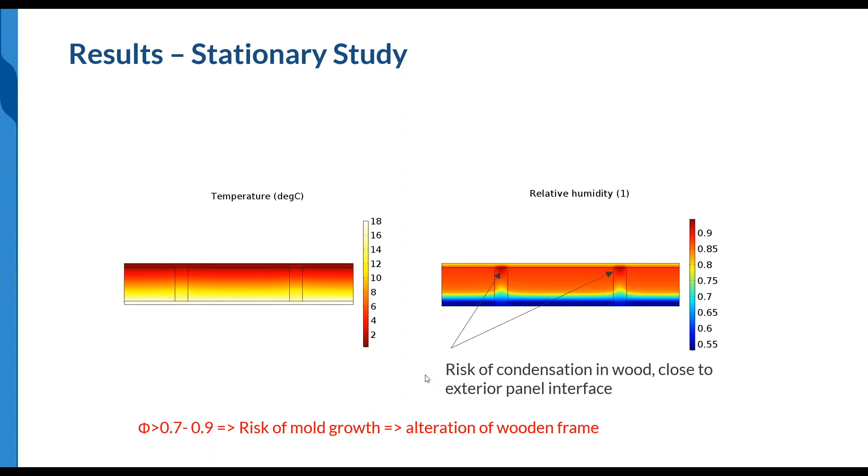Okay, so that's all the example I was willing to show today. I'd like to wrap up. So today I tried to cover the different benefits for numerical simulation, but also the limitations.

What is a model? Where it's coming from the law of science, what it's going to the numerical algorithm, and to get an approximate solution. So it's always based on some hypothesis. When you want to describe the reality, you often have to combine different physics, and for buildings, we are very often interested in heat transfer, moisture transfer, as well as structural mechanics.

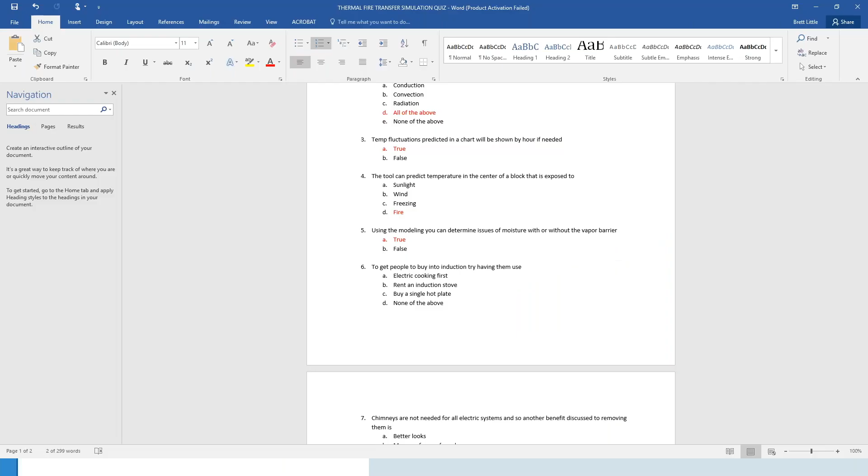I would say the point is that there are a number of classical configurations where we already know what to do, and professional experience is enough to find the good designs. But as soon as things get larger, bigger, or unknown, then intuition or experience is just not enough. So if you really want to get good quantity, good accuracy on your prediction, then the simulation is of interest.

The other question is, I would like to know if the moisture transport simulations can take into account moisture movement by airflow. Okay, so that's a good question.

In the example I've shown, and the reference I gave for this standard about moisture transfer in building materials, the moisture flow is not explicitly taken into account. There is some moisture motion due to capillarity, but they are accounted for in an implicit way, I would say. If you want to account for moisture flow due to air movement, you need to use another set of equations. In COMSOL Multiphysics, we have different domain properties: domains where you want to compute the flow velocity explicitly, and domains where you want to use the simple building material models. Depending on the cost you are ready to pay for your simulation in terms of hours or memory, you can use one approach or the other, but both are available.